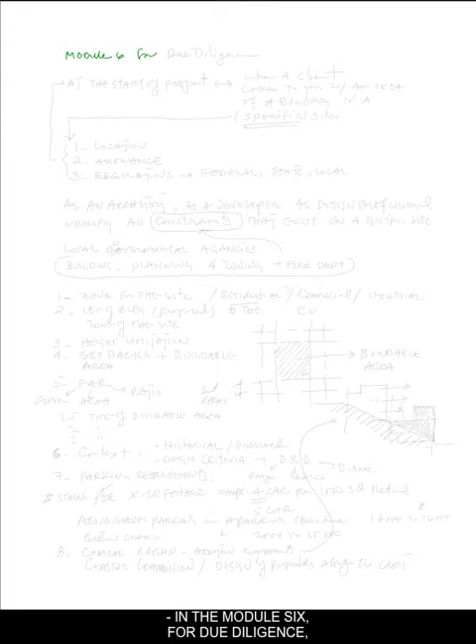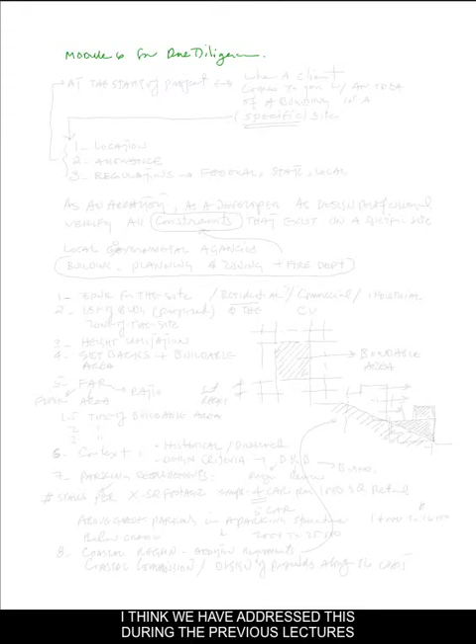In Module 6, for due diligence, I think we have addressed this during the previous lectures at the beginning, and then we mentioned it several times during the course of other lectures. But generally, at the start of the project,

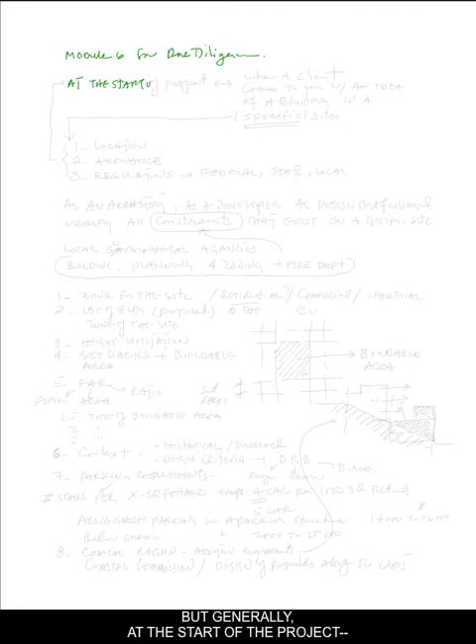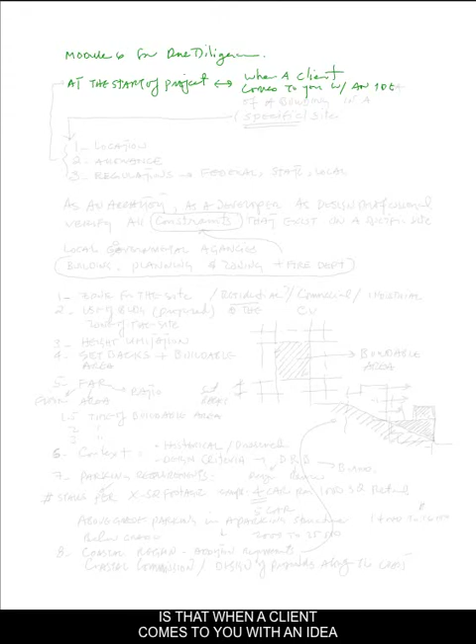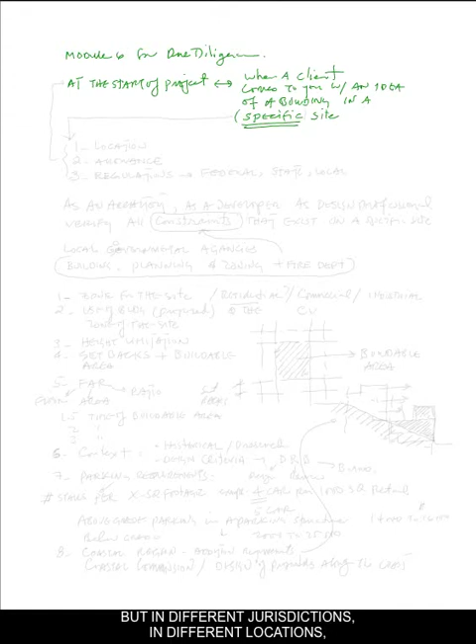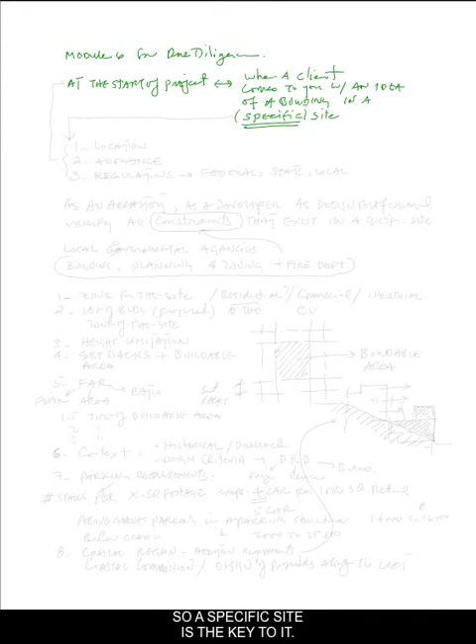actually at the start of a project, what I mean is that when a client comes to you with an idea of a building in a specific, remember the word specific, site. So a specific site is the key to it.

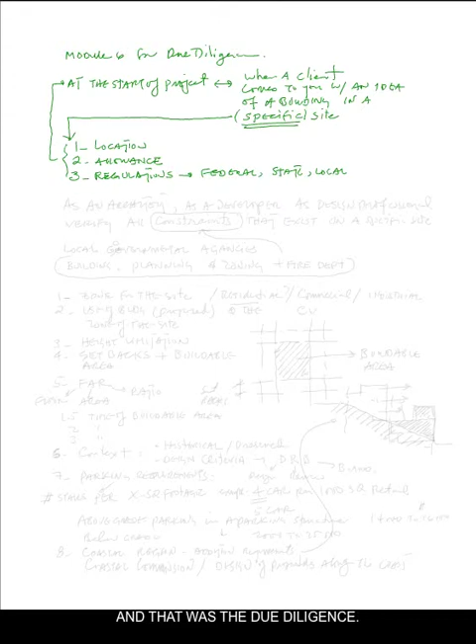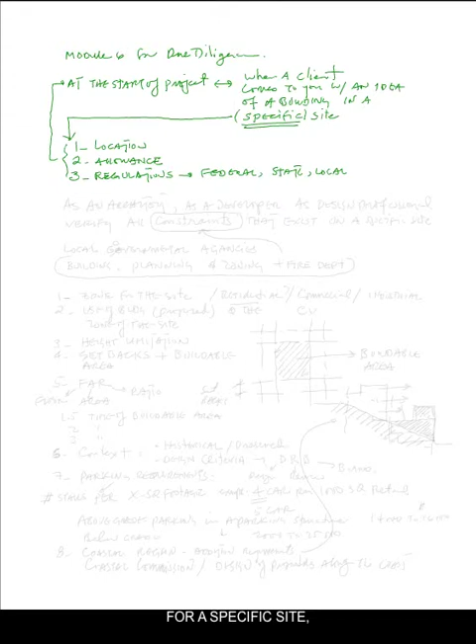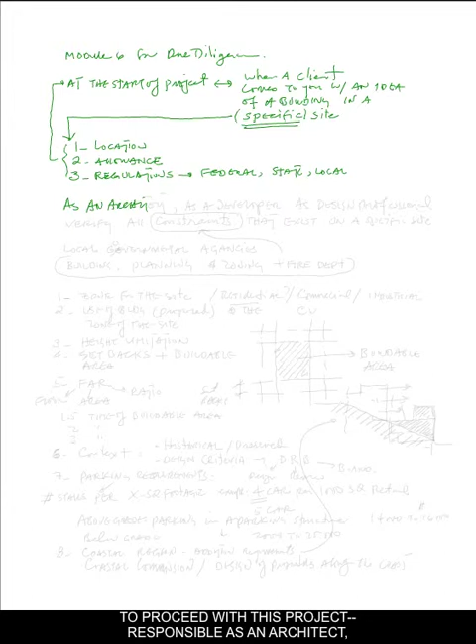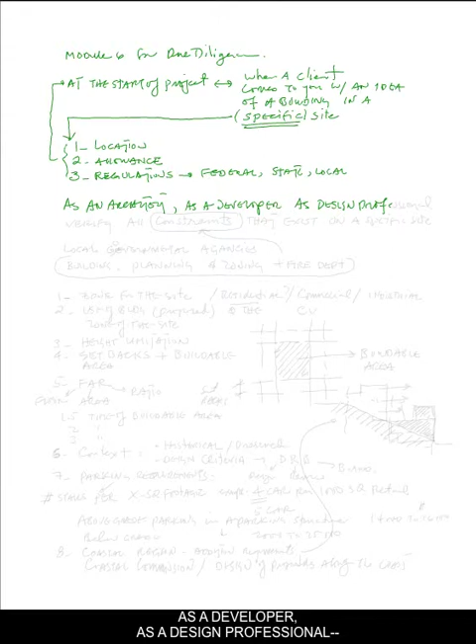Which brings us well back to what I just started, and that was the due diligence. When a client does come to you with a specific idea for a specific site, and asks you whether this is possible or not, or says if we might want to proceed with this project, you are responsible - as an architect, as a developer, as a design professional, and that includes the engineers - to verify all constraints that exist on a specific site.

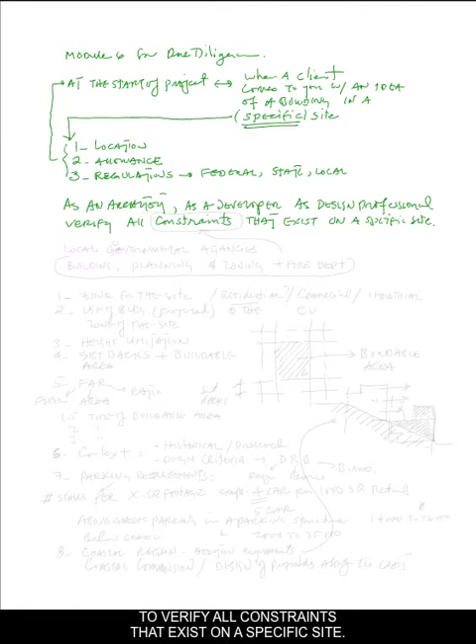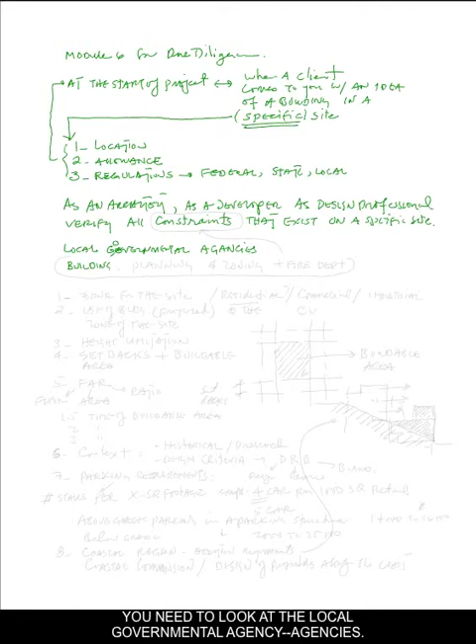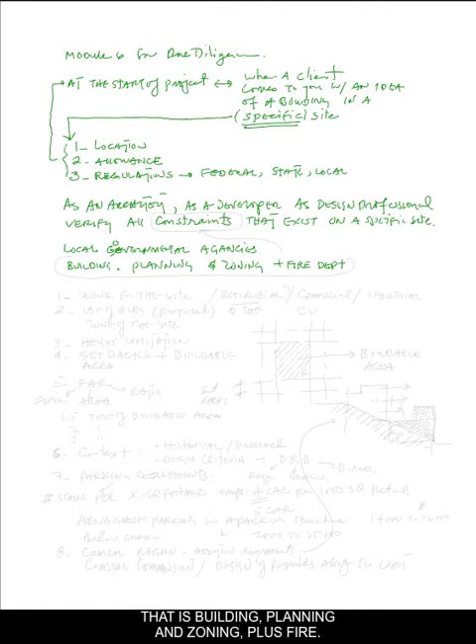Now, when we list this, you need to go to the local governmental agencies - that is building, planning, and zoning, plus fire. You need to get the information from all of these organizations, which define for you the constraints.

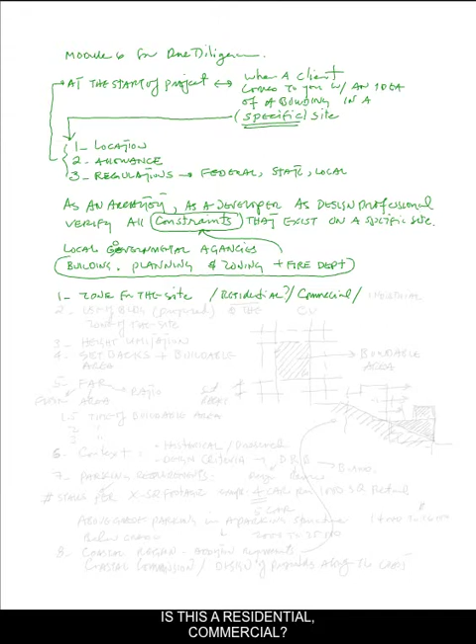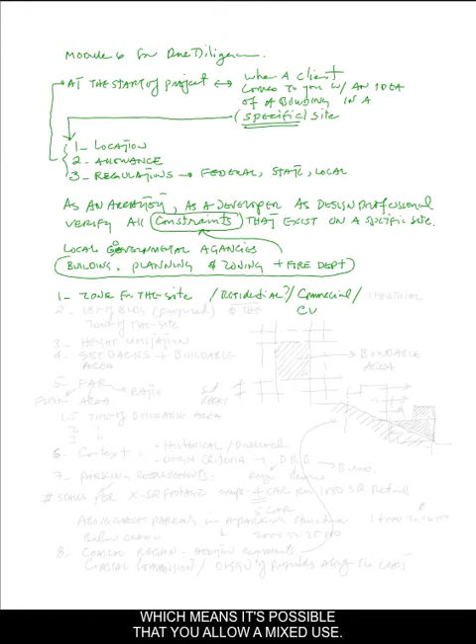If I were to start the constraints, here are: 1, zone for the site. What zone does this site fall under? Is this residential, commercial? Some jurisdictions, including Los Angeles, have a CV, which means commercial variable, which means it's possible to allow a mixed use. Or is it industrial? In an industrial zone you will not be able, for example, to build a residential.

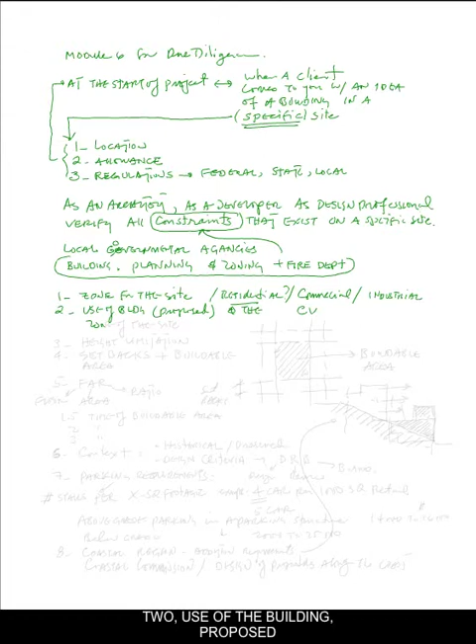So these are all the items that you need to look at. 2, use of the building proposed, and the zone of the site. That's what I was just telling you - for example, in an industrial area, you cannot build a residential condominium or apartment.

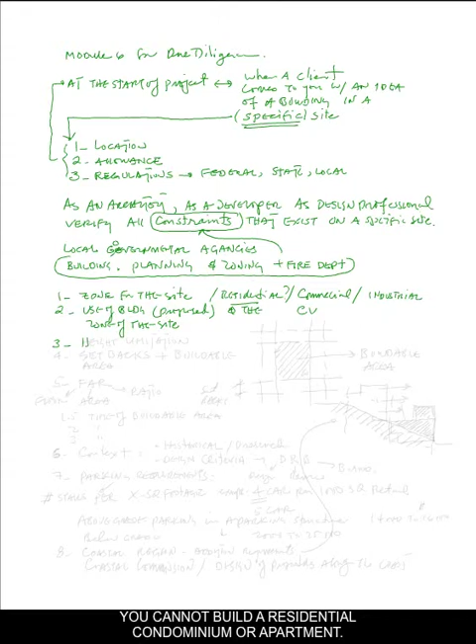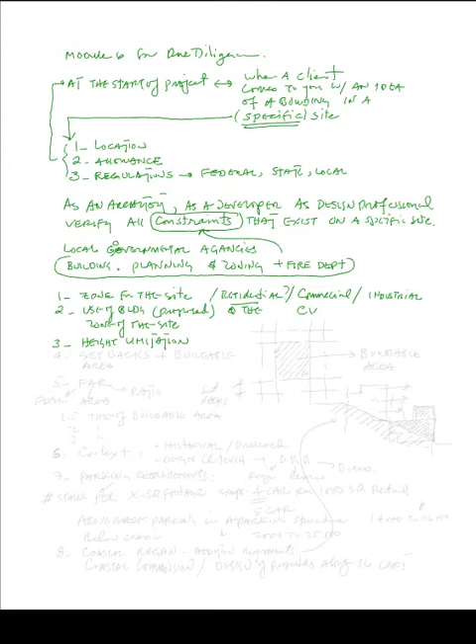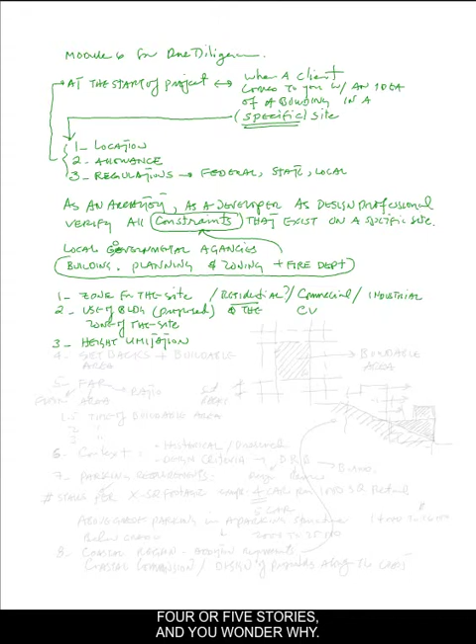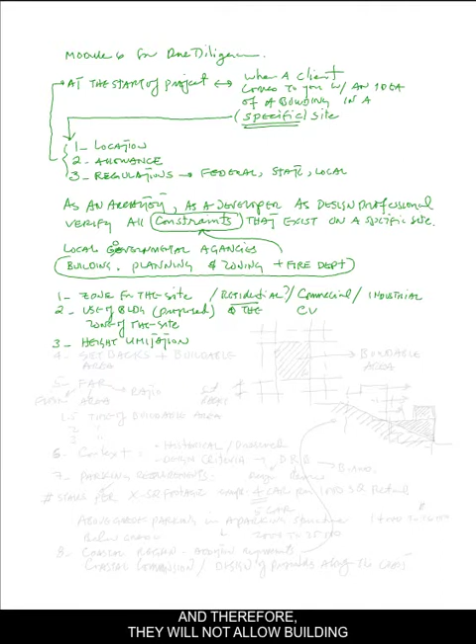Number 3, height limitation. Every zone has its own height limitation in the local area, and it needs to be verified with the local agencies. Because you might see one block in the street where two properties are next to each other, but one has been allowed to build 4 or 5 stories, and the other has not, and you wonder why. If you look into it, you will realize, just as an example, that site falls under a flight corridor to an airport, and therefore they will not allow building more than 1 story, while the other building happens to be on the other side of that flight corridor. So here's the height limitation.

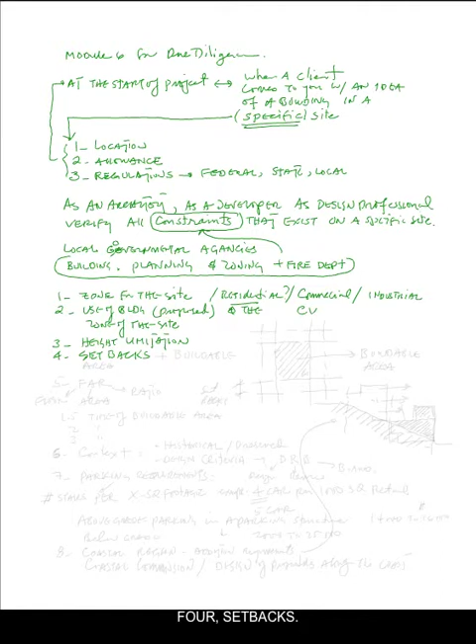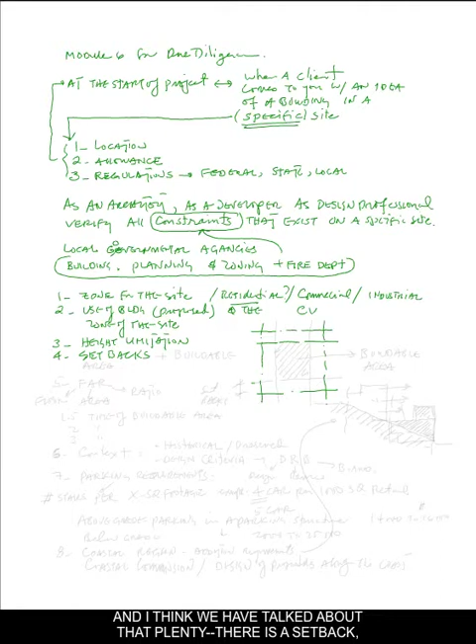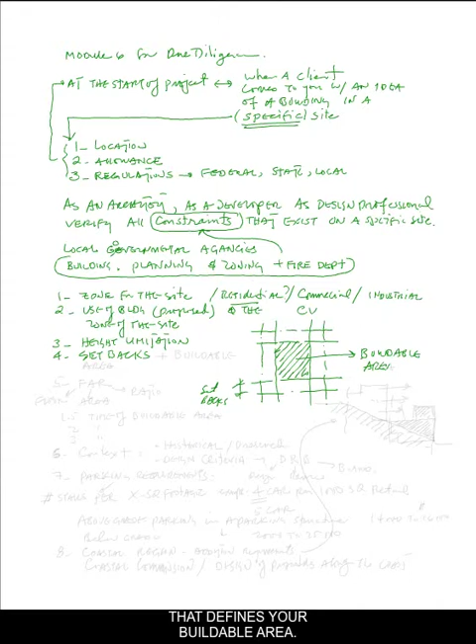4, setbacks. If this is your property, and I think we have talked about that plenty, there is a setback. And all of these are setbacks, which define your buildable area. Setbacks plus buildable area.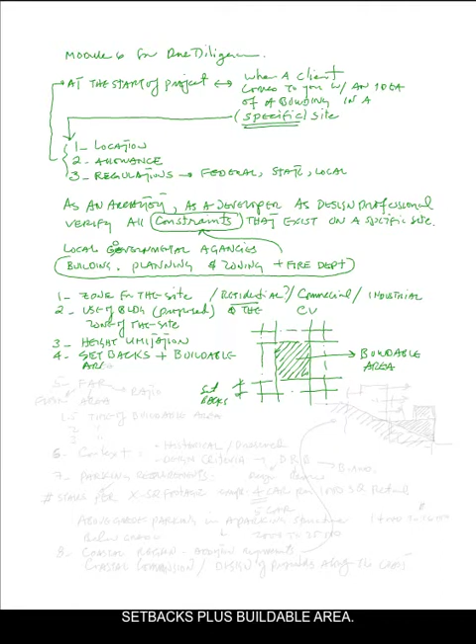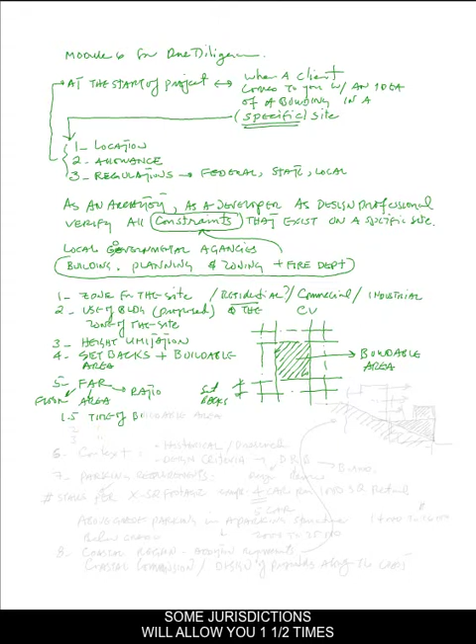5, FAR, which is the floor area ratio. Some jurisdictions will allow you 1.5 times of buildable area, some twice, 2 times, some 3 times. It depends on every jurisdiction that you go to.

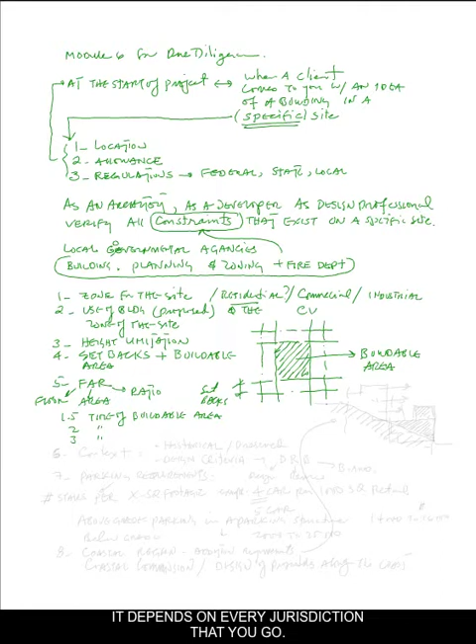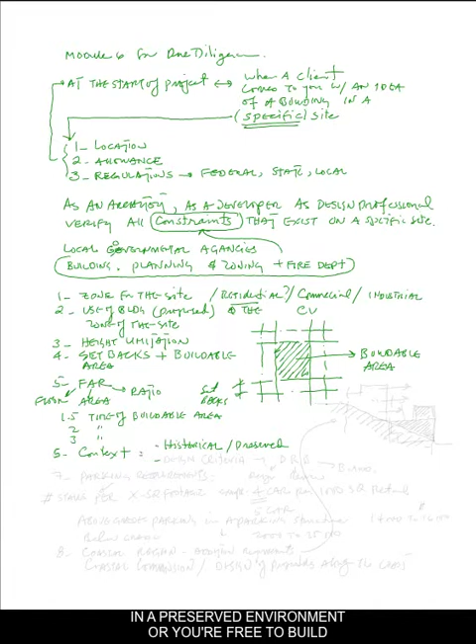Context. When I say context, is this a historical and a preserved environment, or are you free to build any types of building?

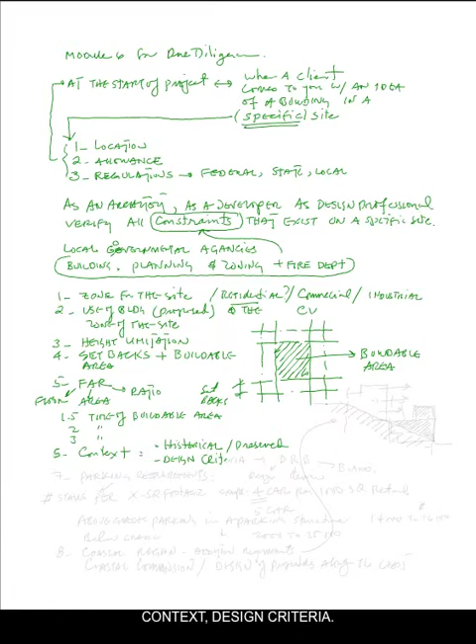Context, design criteria. A lot of communities have set up design criteria. We are very familiar with DRBs, which are their design review boards.

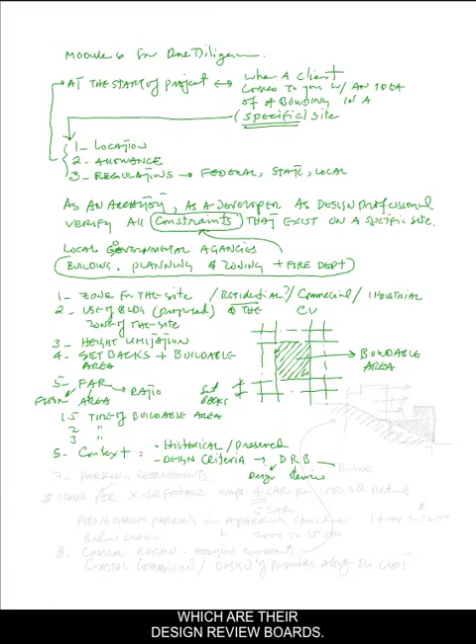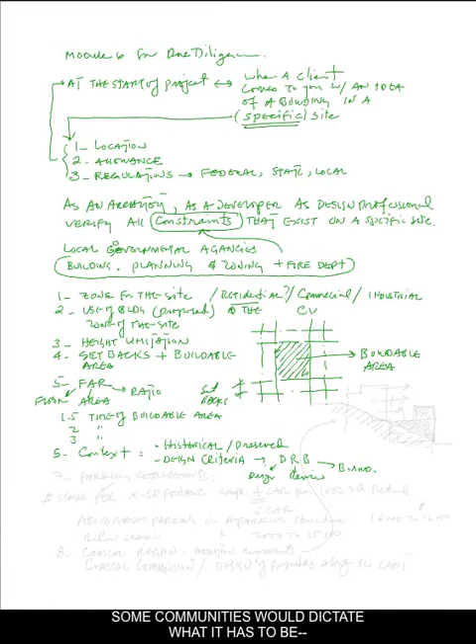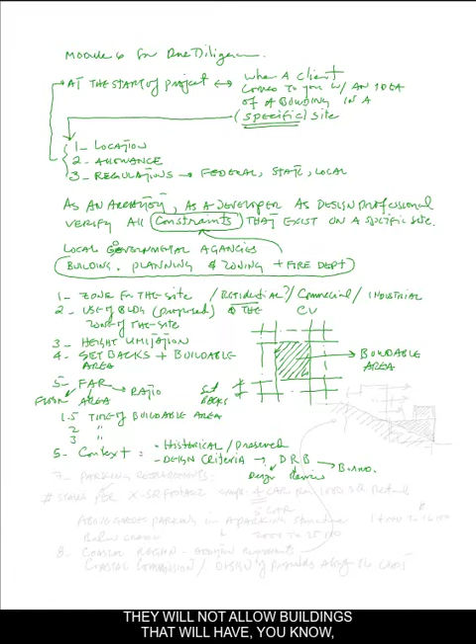Certain communities will not allow certain types of buildings, all glass or modern. Some communities would dictate what the roof has to be covered with. Even though it doesn't seem correct, everyone is in charge of their own property, but at the same time, in some jurisdictions, because of the context or the objection of the community, they will not allow buildings that have a very contrasting character than the rest of the buildings within that community.

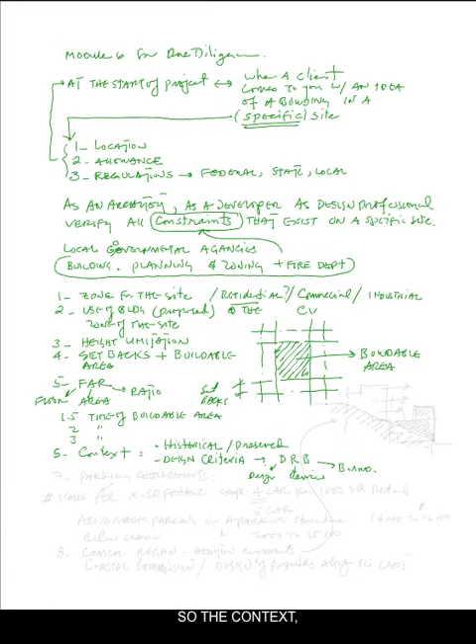So the context, and whether it is part of a historical preserved environment, or part of the design criteria system - what is that design review, what is the design criteria?

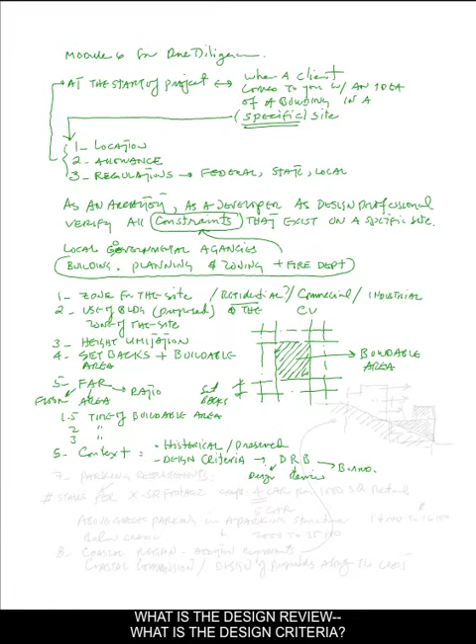So you do not want to embark on a project where you design it in a modern system, with a flat roof and glass walls and everything else, and then you go back to design review and they say, well, where have you been all this time? We won't allow anything like this. So you need to address that from the beginning, because if you don't, you need to redesign the project at your own dime, and that's not what you want to do.

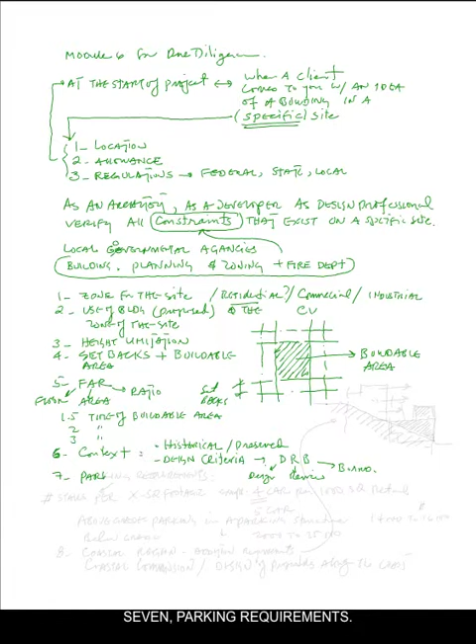7, parking requirements.

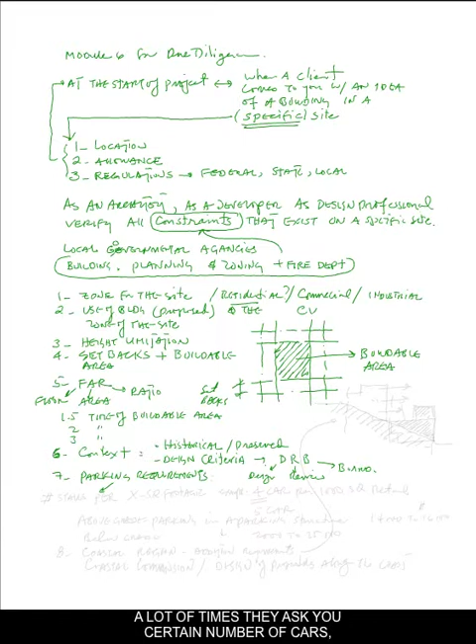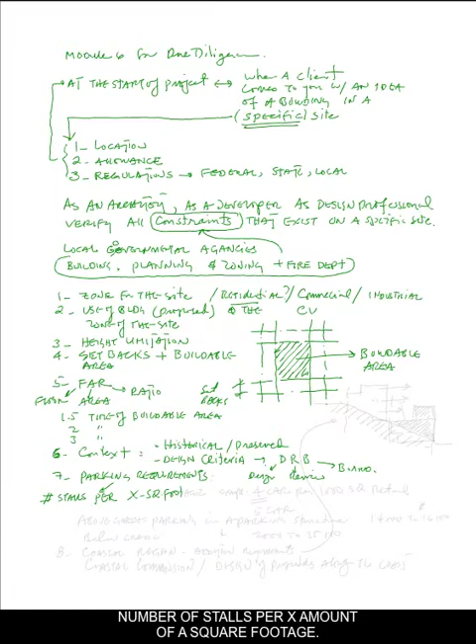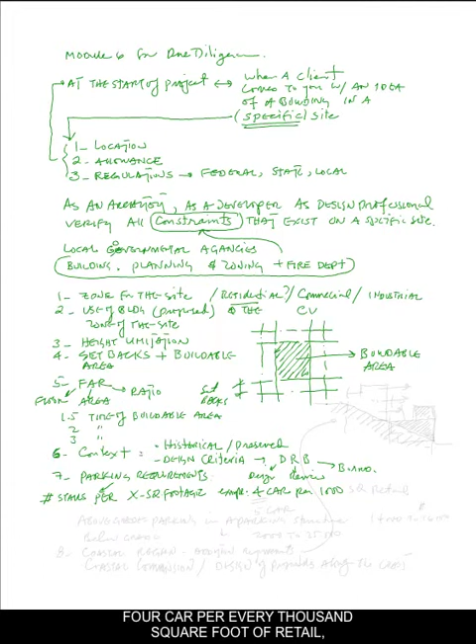A lot of times they ask for a certain number of cars, number of stalls, per X amount of square footage. For example, in a certain jurisdiction you need 4 cars - make it an example - 4 cars per every 1,000 square foot of retail, which is a pretty good criteria for designing shopping centers and malls.

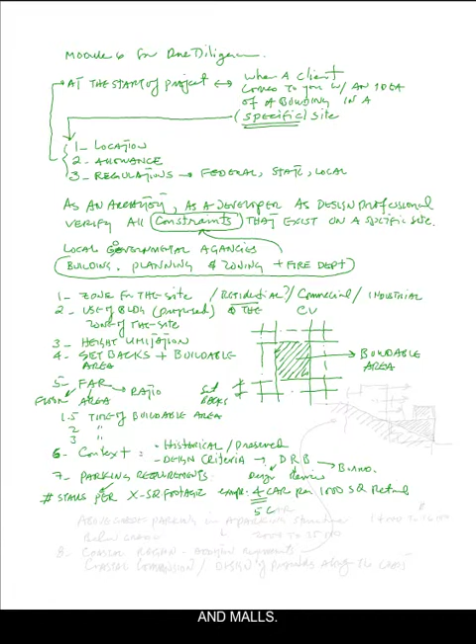Some areas require 5, but you need to make sure, because that might make a major difference - you might have to go one more level below grade, and that is a lot of cost.

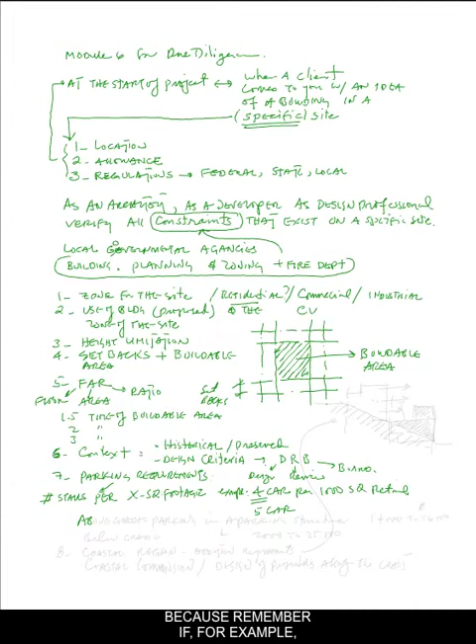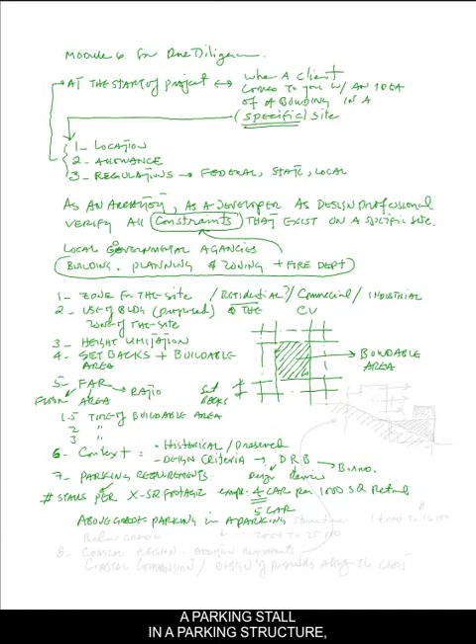Because remember, if, for example - the reason I bring it up - if you're above grade, a parking stall in a parking structure, that's how they count the cost of a parking structure, is per stall, is about $14,000 to $16,000 per stall.

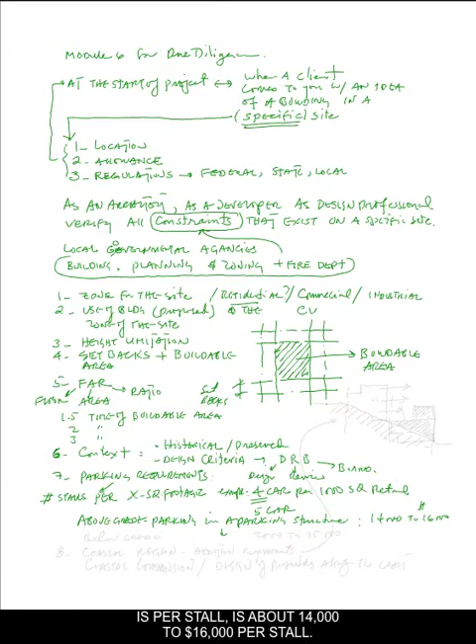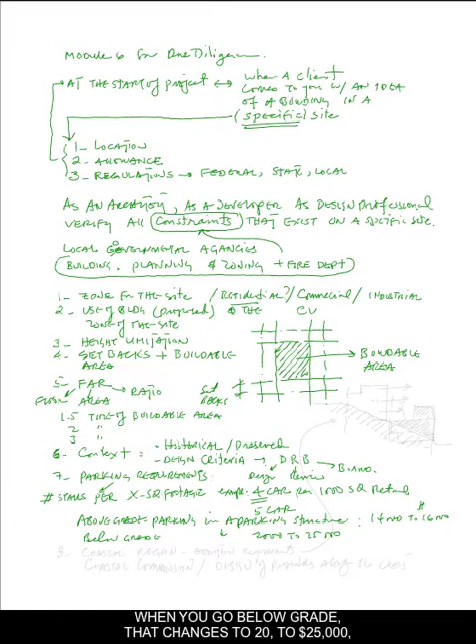When you go below grade, that changes to 20 to 25,000, depending on where you are. So that makes a major difference.

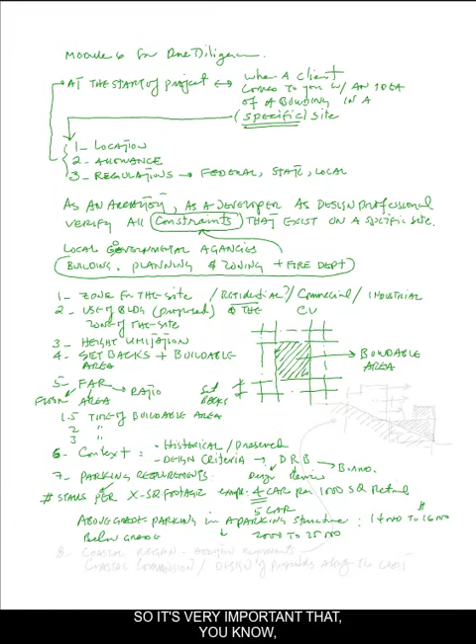If you have 100 cars that need to be put below grade, that means you need another level, and 100 cars multiplied by this gets your budget $2.5 million more, and that can kill the job. So it's very important that you realize what your parking requirements are, where you locate them, how you spread them out on the site, and access.

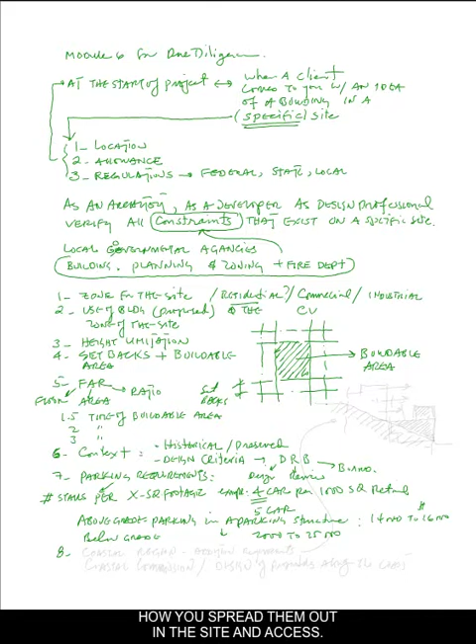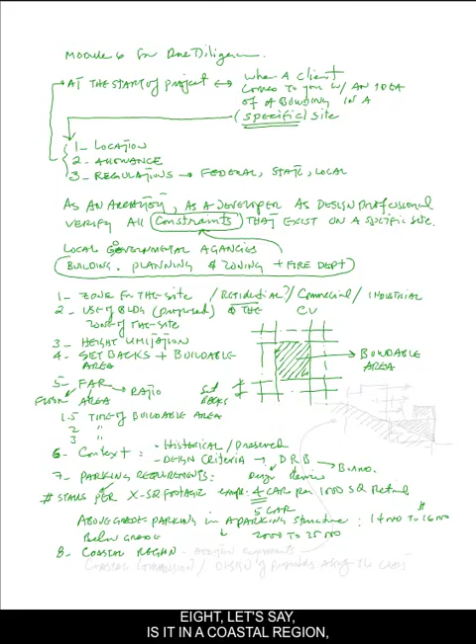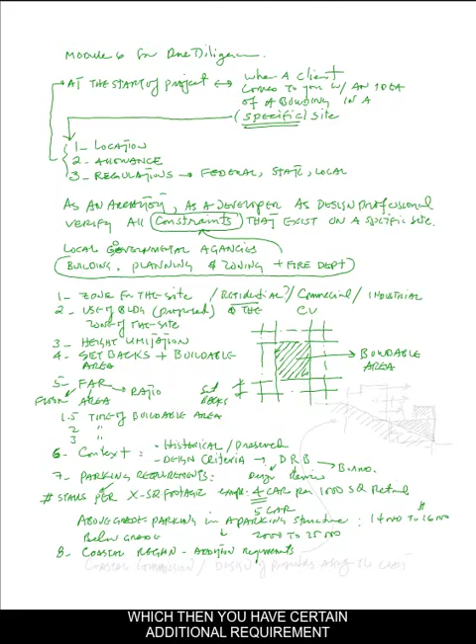8, let's say, is it in a coastal region, which then has certain additional requirements for projects located in coastal regions.

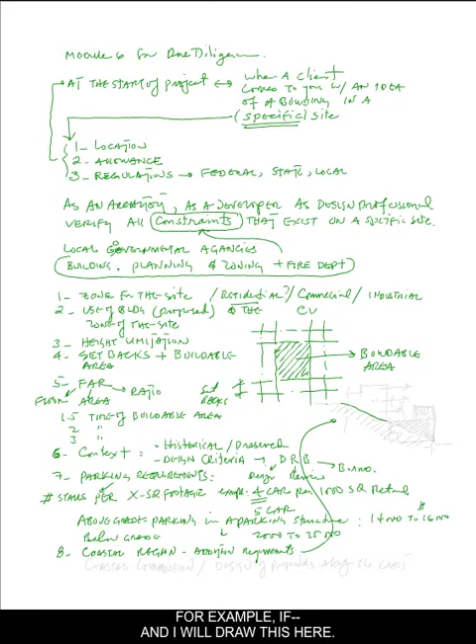For example, I will draw this here - here's a section of a site, here's your property, here's the neighbor's property, and you both have access to the road. This guy's building is situated here.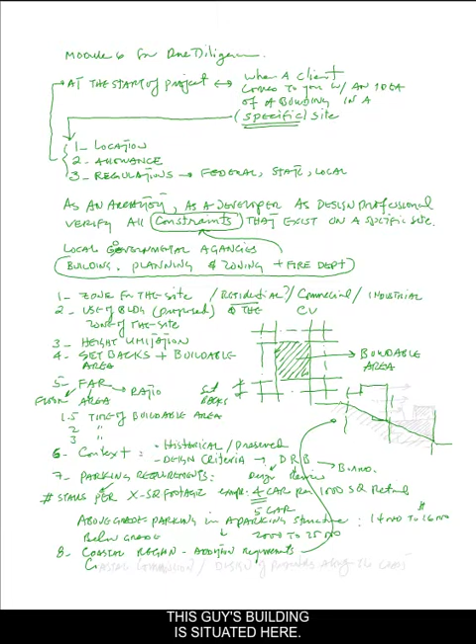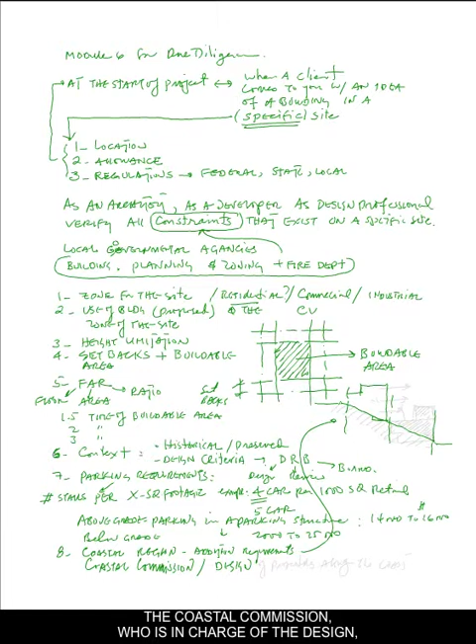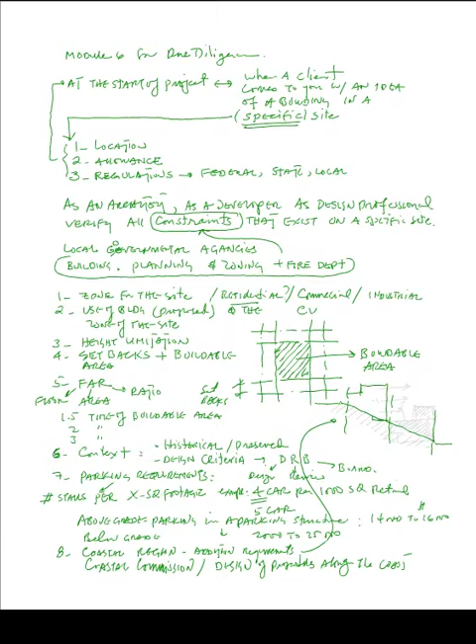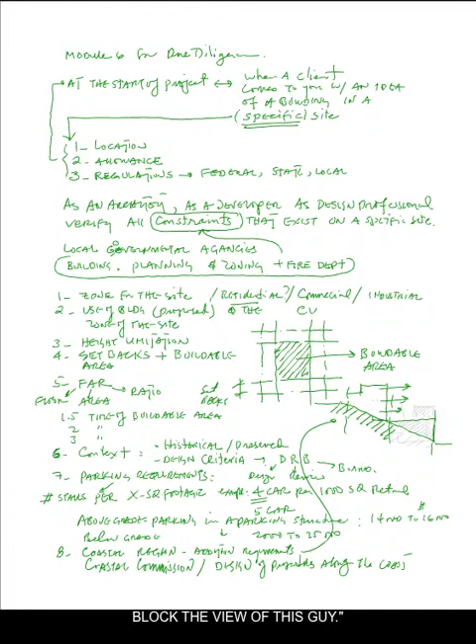The Coastal Commission, who is in charge of the design of properties along the coast, will look at this and say, well, your building has to be limited in height because you cannot possibly block the view of this guy who was here first. Granted, you bought the property, but if you build above that, you're going to kill the value of his property out here because he will lose his view to the ocean.

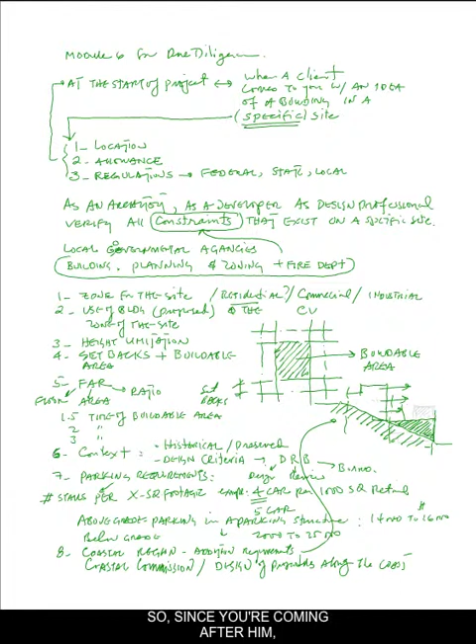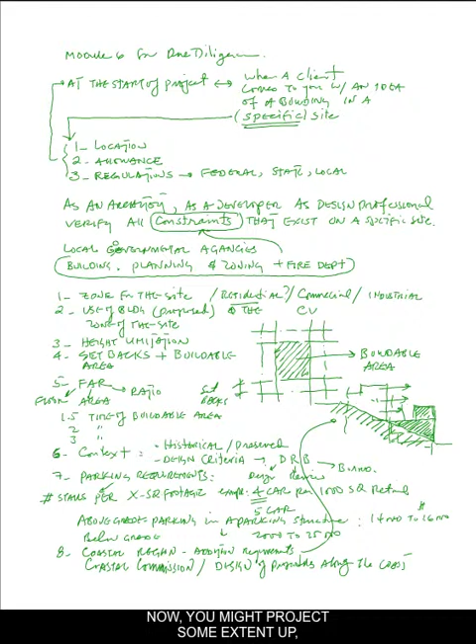So since you're coming after him, you need to observe his presence there and build a project like this. You might project some extent up, and that is a compromise, but you sure cannot completely come up and block his view, so you need to go through this process of approval.

I will pick up in the next lecture.